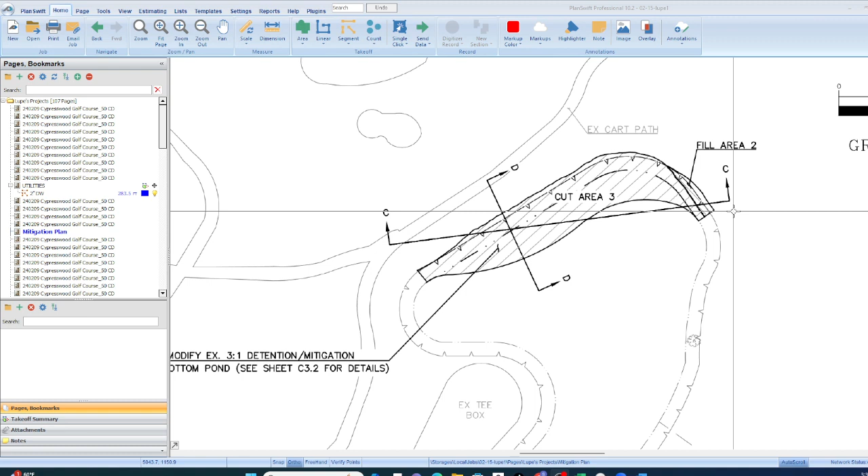So let me show you one thing. Excavation. What this plan does is it gives us our cut area, and it gives us some section views. You've got to know how to look at that. You've got to know what that means. So basically what it does is it brings you to something like this that's to scale. Gives you your cut area.

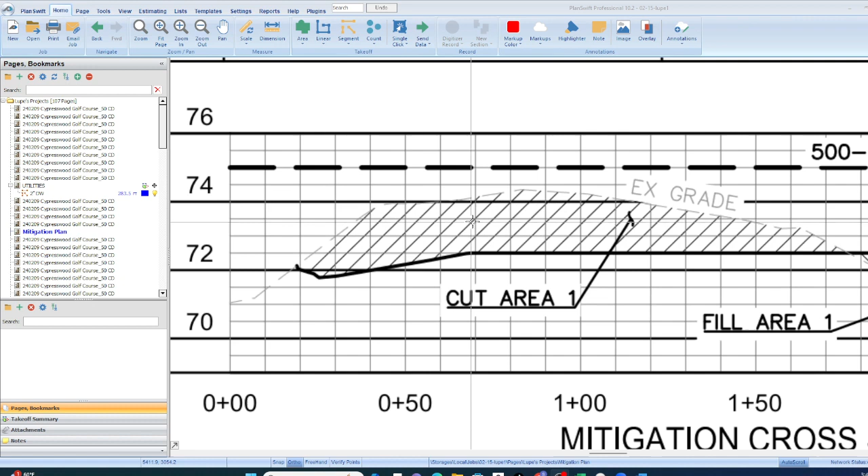What's proposed grade is always going to be in black. What's existing is always going to be in gray. And so if you use this scale, you'll be able to determine how many cubic yards you need to cut or fill.

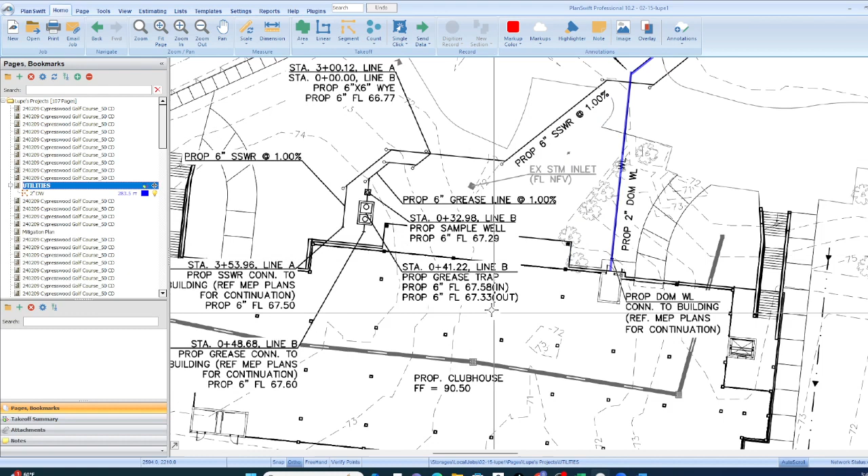Okay, now underground utilities. Everything is shown here. This means something. This tells us the size of the pipe, what it is, and tells us the GPS coordinate of where the pipe is coming in to that grease trap and where the pipe is going out. Okay, so if you do this for a living, it's really important that you're able to read these plans.

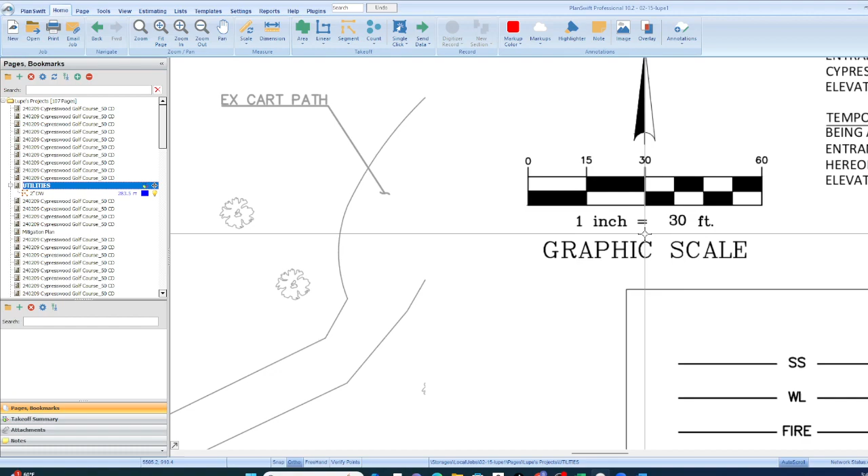So we put this to scale, and for every 1 inch, it's really 30 feet. So we scale it, then we measure it. So just very quickly, we measured this DOM, that's the domestic water line, and we had about 283.5 feet of that. And then we also have a 6-inch sewer line.

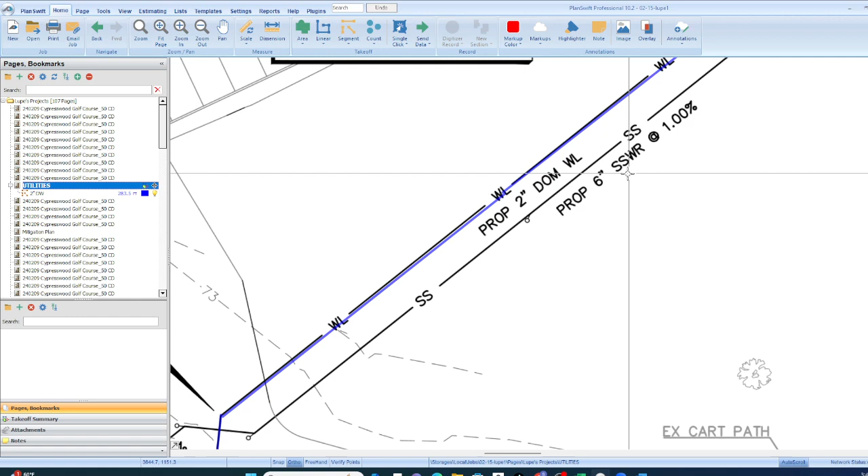This tells you the slope. It's to slope 1% as it moves on per foot. So that's why you want to take these classes if you're doing this work. You want to understand what all the symbols mean. What's the difference between proposed and existing? Why is one gray? Why is one black? We explain all of that. How to read the scale.

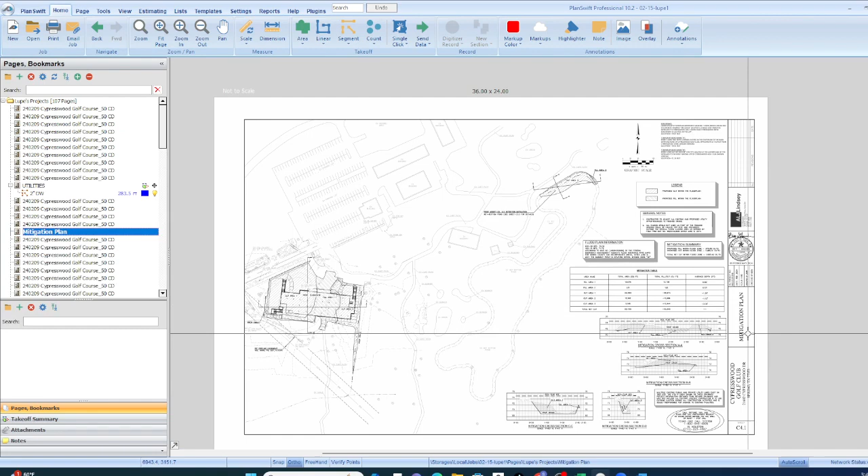Okay, so I just wanted to go over this very quickly. If you're doing underground utilities, you also have to do the excavation. Now they have a new fancy term, mitigation plan. I don't know why, it's just the excavation plan. Same thing here though. For every inch you measure, it's 30 feet.

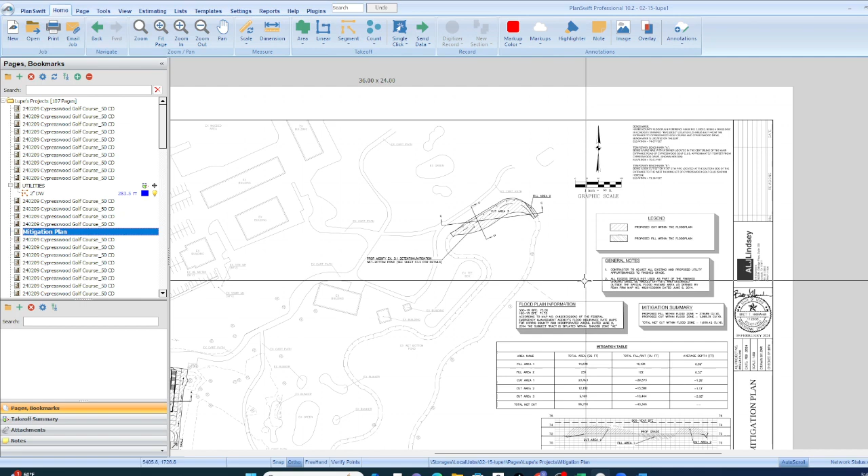The utilities, underground utilities, what all this means, and how you can learn to put your estimates together and to perform very accurate takeoffs. What view are we looking at? What's the difference between the plan view and the section view?